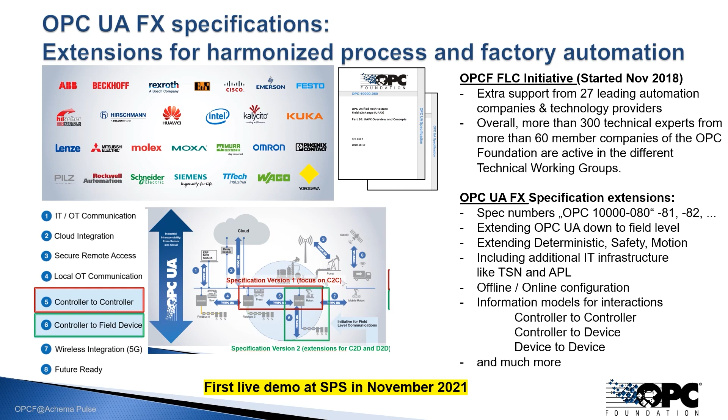Being a paying member inside the OPC Foundation guarantees you early information and you are able to influence the direction. Part of our community is, with more than 300 technical experts from more than 60 companies, the so-called Field Level Communications Initiative, which is bringing OPC UA down to the field, including deterministic, including functional safety and motion, but also harmonizing between the process industry and the factory automation world. This is what we need. And I'm looking forward to having the first live demo at this year's SPS show in November 2021.

I'm not talking deeply about OPC UA here, but again, it's open, it is open source, it is an IEC standard, it is vendor neutral, platform neutral, and independent from any operating system. It is not a protocol. Instead, it has modeling capabilities to design and model your information, bring them into a context, and then have inside the body multiple different protocols which also can be extended for future need, but then deliver an end-to-end secured data exchange. This is what we believe is critically important. Security has been baked in by design and has been reviewed by international security experts.

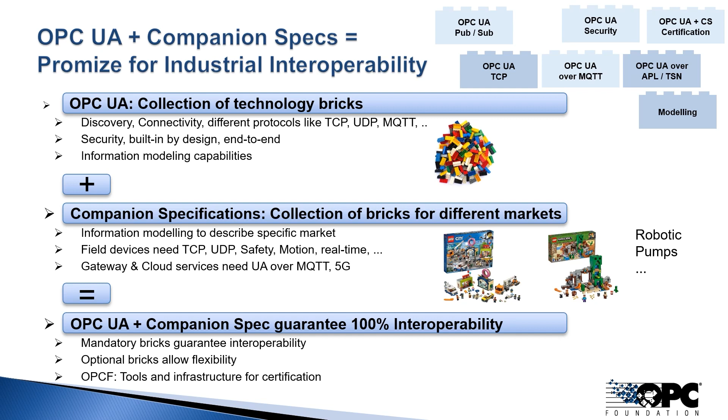Well, I'm an engineer, not a legal person, so I'm a little bit more careful here, but what we are very proud of is that the OPC Foundation is not only protecting their own members, instead we are protecting and have a commitment to take care of all implementers. That's critically important, and I think this is really unique. You don't find that many organizations on the market.

And second, we are extremely proud of our so-called multi-organization collaboration agreement, the MOCA, because this enables owners to easily agree on being a co-owner. Here, for example, we are really excited that the LADS companion specification for laboratory and analytical device standard just extended the ownership, which initially has been created by SPECTARIS, VDMA, and OPC Foundation, now to multiple other associations. And so everybody feels involved, everybody is committed, and this is how we can grow standards in the world. We need to work together, but we have to agree on the most open approach.

We are partnering with a lot of associations around the world. Definitely there's not a chance here to highlight a few of them, but please go to our web and have a detailed overview. As mentioned, we have over 63 international collaborations. In total, 48 companion specifications are published already as a released specification or available as a release candidate right now. So please go to the web and have a detailed overview.

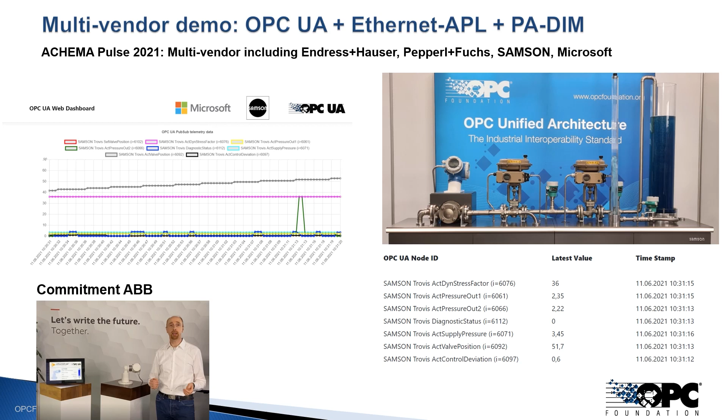If you want to learn more about a real-world success story and what have been the benefits of OPC and why the company Equinor have selected this, please join the detailed report from Equinor. They are giving much more detail on how they have connected 190,000 data points via OPC through the Microsoft Azure cloud, and they are even extending it up to 1 million data points.

This is a slide I started with at the beginning, explaining the 5 building blocks in detail. It's OPC, the framework, which is more than just a protocol because it includes the capability of information modeling for semantic interoperability. It includes security for end-to-end security. We are the largest ecosystem for secure industrial interoperability, including the field level communication initiative, bringing OPC down to the field level, including deterministic, functional safety, motion.

We have one of the most open IPR policies in the world, protecting also implementers, not only doing a commitment to our own members. We joined the Ethernet APL initiative because the OPC technology is extendable, same as we are extending it for the factory automation people with TSN and other technologies, or with 5G, to guarantee that we can have chained transport paths with multiple different infrastructures, but with a complete quality of service over different transport technologies.

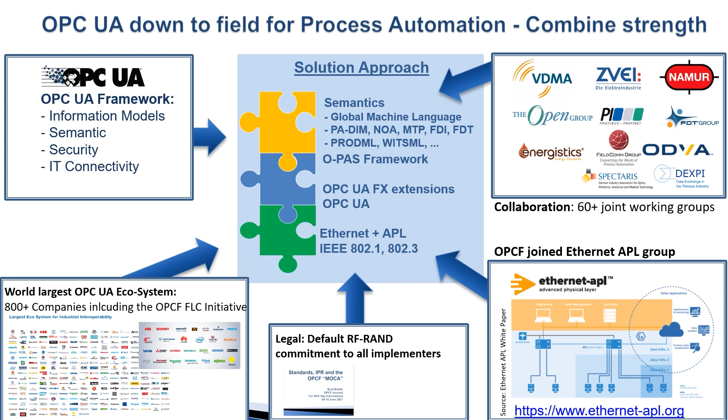That was my introductory overview presentation. I hope you enjoyed it and got some insights and additional information. Again, I'd like to invite you to all the offerings here at the ACHEMA Pulse. We have multiple presentations on the technology, on information models, or how to move data from the field vertically up to IT and cloud, to Microsoft or SAP from our board colleague companies.

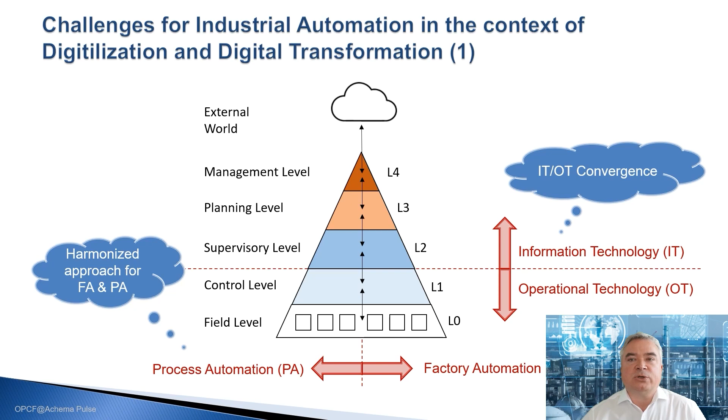What we also recognize is that today we have quite different solutions, different products, and even different technologies being used in factory automation and process automation. But certainly the requirements are quite similar, if not to a large extent identical. This is why in future we have to strive for a harmonized approach that is not distinguishing what kind of industry or vertical products or solutions are being used for.

Probably one of the key challenges is the huge diversity that we have with regard to protocols and data models, especially when we look at the field level, because there we have all the different field buses and real-time Ethernet protocols. We still have digital and analog interfaces. And looking at the data modeling, we also use different device profiles just out of historical reasons.

But this is all making life complex and difficult, especially if you want to analyze data, if you want to derive certain strategies out of the information that you collect from the plants and factories. This is why we have to come up with solutions that support the so-called semantic interoperability.

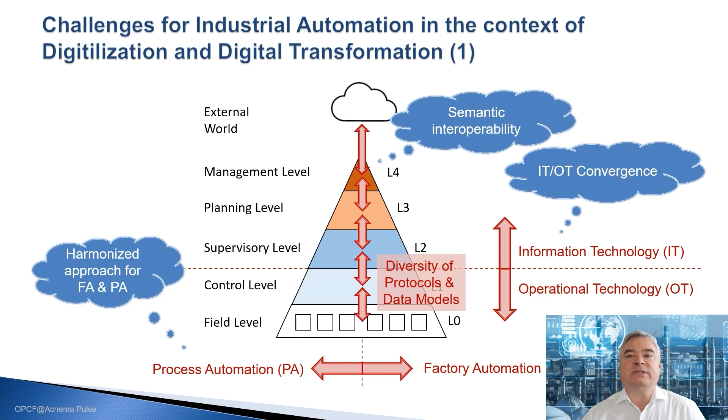Even so, this is beneficial because existing solutions can be kept and the connectivity is improved by the second channel. At the same time, there are some disadvantages. You are adding an additional second channel, so the devices need to support an additional protocol, increasing the complexity. And this is also only a unidirectional path from the process up to edge, up to cloud.

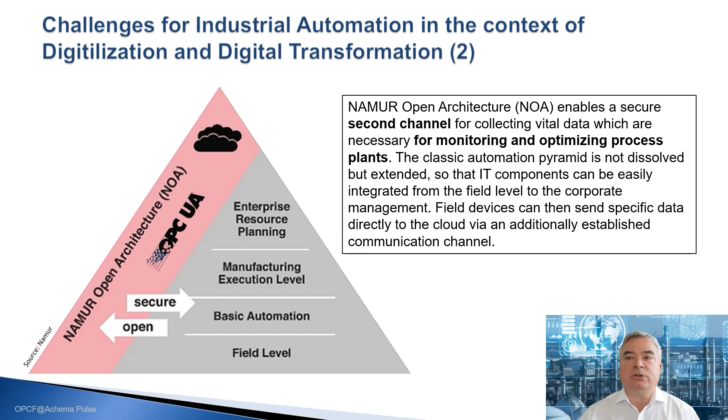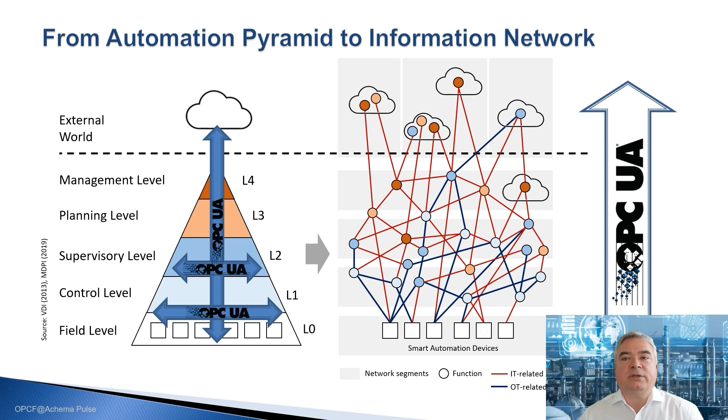Now, the approach of the OPC Foundation with the launch of the Field Level Communications Initiative back in November 2018 is to extend OPC UA to the field level so that it fully scales from the field up to the cloud, not only vertically in both directions, but also supporting horizontal integration, the horizontal communication. With this approach, OPC Foundation targets to convert the classical automation pyramid into a much more universal and flexible information network, where you can have direct connectivity between devices, controllers and software applications, independent of whether they are located in the field, the edge, or even the cloud.

Now, OPC UA today is already used in many different application areas. You find here some examples listed with the numbers 1 to 4: secure remote access, local OT communication, and cloud integration. The Field Level Communications Initiative is now extending the use cases to also cover controller-to-controller and controller-to-device, listed here with the numbers 5 and 6. And this also includes device-to-device.

To support these use cases, the OPC UA framework is being extended with features and functions for field exchange. This is why we name these extensions OPC UA FX. This includes, for example, extensions to support functional safety, to support real-time data exchange including deterministic transport. It also defines features, what we call facets, for motion control, for remote IOs, and also the connectivity to field instruments.

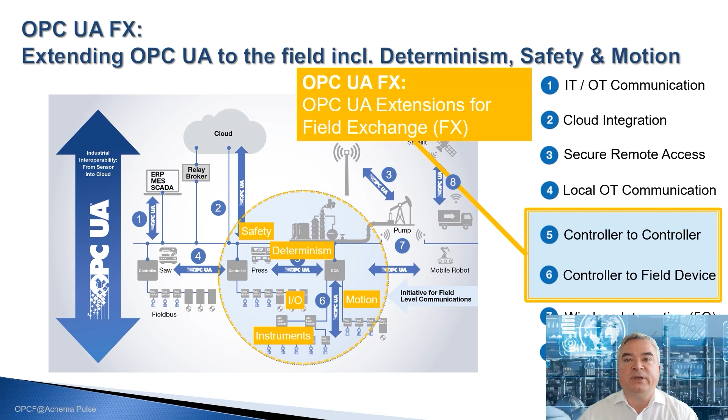Let me talk a little bit about the initiative itself. The initiative is supported by overall 27 member companies that are part of the so-called steering committee. These companies bring in additional resources, financial resources, but also manpower and expertise.

Browsing through the logos, you see that all the big players in industrial automation are supporting this initiative. So we have, for example, from the US, the companies Emerson and Rockwell Automation. We have from Europe the companies ABB, Siemens, and Schneider Electric. And looking to Asia, we have the big players out of Japan with the companies Mitsubishi, Omron, and Yokogawa.

The technical solution being elaborated is supported by more than 320 technical experts coming from more than 65 member companies of the OPC Foundation. This makes us really proud that this initiative is getting such strong support from industry all over the world.

Now, first of all, I want to highlight that in order to support industrial interoperability, you need to have standardization at all the levels listed here on the slide. So you need standardized network access, you need standardized protocol, and you need standardized data semantics.

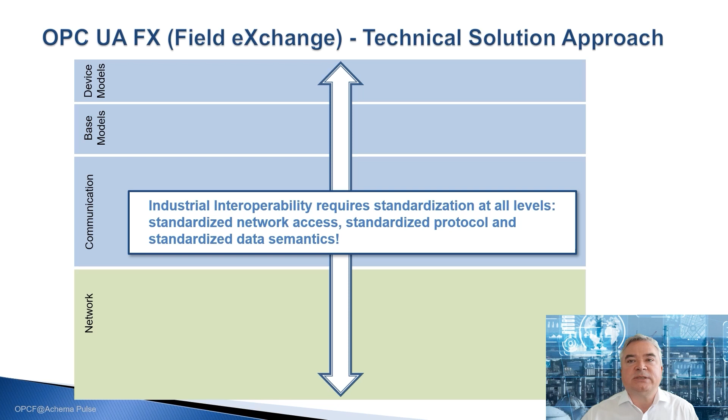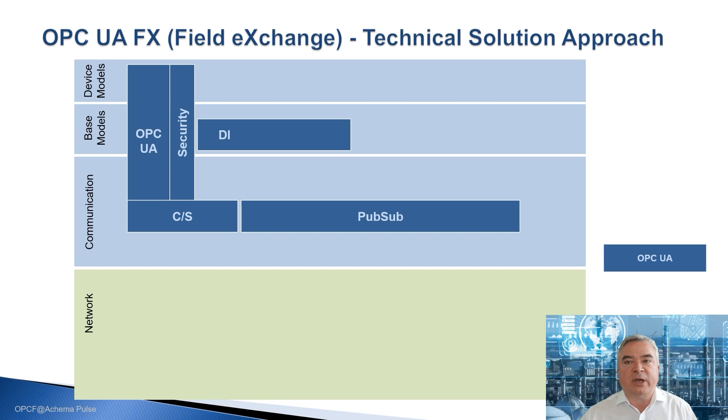The solution for field exchange, OPC UA FX, is built upon existing OPC UA technology with built-in security, information modeling, client-server services, and publish-subscribe extensions. The technical working groups of the FLC initiative are then extending the information models to support the various automation components, including offline configuration and common behaviors, for example to set up connections between the various automation components and to do the bootstrapping of a complete system.

On top, we then have the various extensions and features to support the various application areas and device types. So there are facets for functional safety, for motion control, for instruments, for IOs, and so on. The concepts are done in a way that existing device companion specifications can be integrated. So this is where we can, for example, integrate the PADIM information model, or the MDIS, or the DEXPI, and all the other companion specifications elaborated through the numerous cooperations the OPC Foundation has all over the world.

Now, if we look at the lower levels, we are relying on various IEC and IEEE standards.

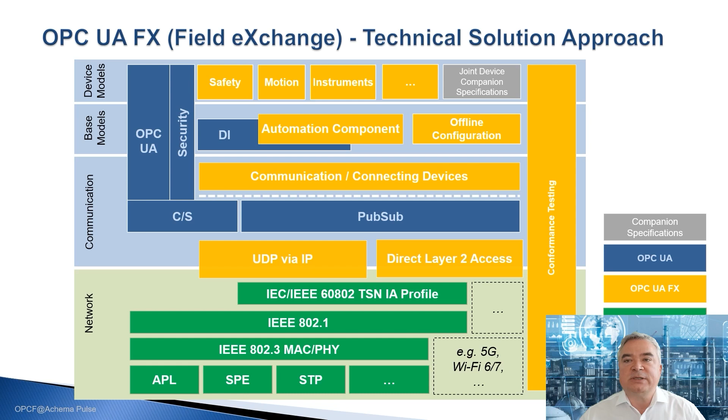A key technology for OPC UA in the process industry is the Advanced Physical Layer Ethernet APL, as already mentioned, because this is bringing Ethernet to the field even in hazardous areas. And because APL is transport agnostic, it supports different industrial protocols, including OPC UA.

This is why the OPC Foundation has become a member of the APL initiative a few months ago, to support the further development of the technology and also to jointly promote Ethernet APL with other standardization organizations.

Now, talking a little bit about the current status of the project and the achieved results. The first specification release, the so-called Release Candidate 1, has been completed, consisting of 4 parts, parts 80 to 83. These specifications are currently being used to do prototyping and to create test specifications as well as test scripts for the certification tool of the OPC Foundation.

Furthermore, these specifications are laying the foundation to do specification enhancements for the additional use cases, controller to device (C2D), including also device to device (D2D) in the next step.

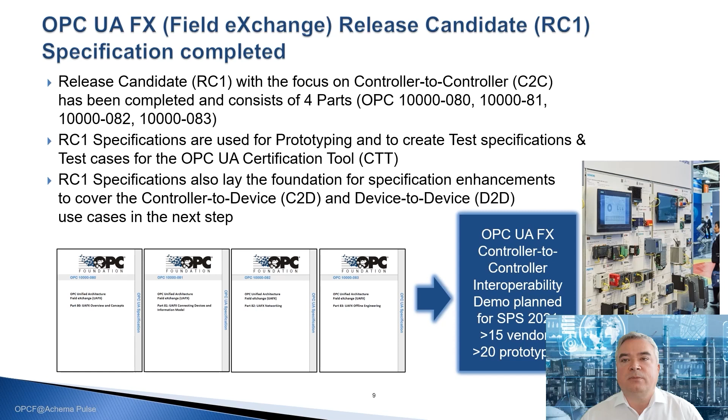Now, with the controller-to-controller specifications developed by the FLC initiative, we allow horizontal integration and horizontal communication between controllers of different manufacturers. So this is the initial step.

And then by bringing OPC UA down to the field devices with the use cases controller to device and device to device, we then have OPC UA as one consistent and standardized interoperability communication solution that is fully scaling vertically as well as horizontally.

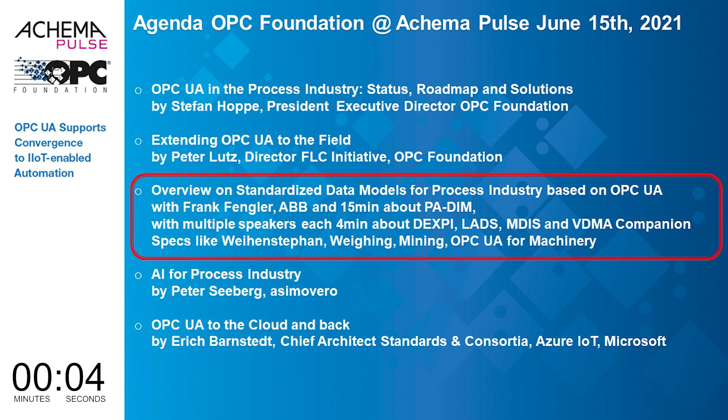Hi, my name is Fengler. I live in Minden, Germany and work for ABB for more than 20 years.

PADIM started in 2017 by Fieldcom Group as a joint working group together with OPC Foundation. When starting, a team of highly engaged Fieldcom Group members driven by key process automation vendors like ABB, Endress & Hauser, Yokogawa worked in close collaboration with end-user organizations like Namur, who provided use cases and requirements. OPC Foundation experts helped with deep questions concerning OPC UA technology.

Goal is to standardize an information architecture for all process automation devices using OPC UA as a base and the DI model.

Some definitions. Information model: a nested, hierarchical description of an asset including identification, diagnostics, process signals and configuration.

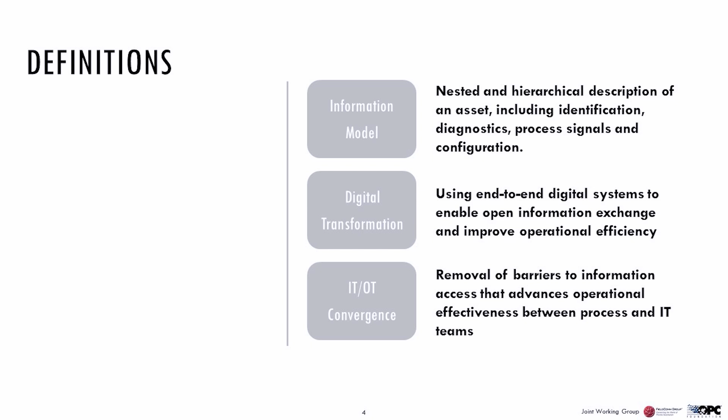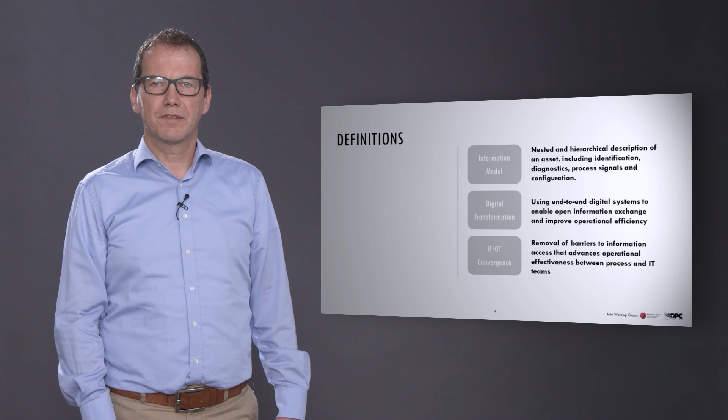Digital transformation: using end-to-end digital systems to enable open information exchange and improve operational efficiency. IT-OT convergence: removal of barriers to information access that advances operational effectiveness between process and IT teams. These definitions are important because they guide us through the whole presentation and are important to understand.

Crossing the OT-IT chasm. OT understands automation protocols, fieldbus, device descriptions, DDs. Plant IT understands asset management, Ethernet and security. And the enterprise IT understands ERP systems, analytics, security. So everybody understands something in his domain.

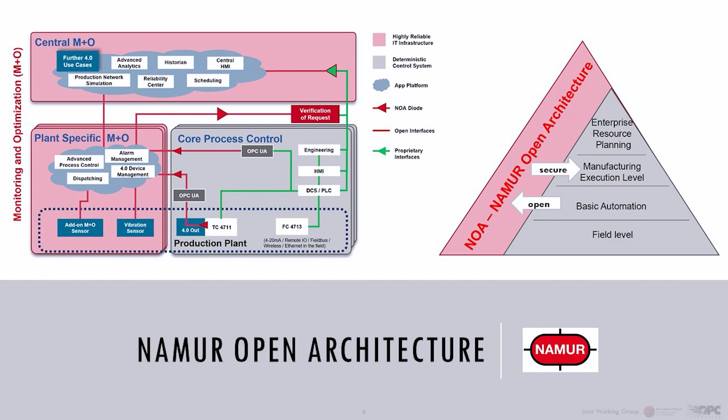Therefore, Namur has created the NOA information model. The key is that Namur first thought about the use cases and then derived the parameters necessary for these use cases, and all of this is mandatory defined. PADIM is used to implement the NOA information model with OPC UA.

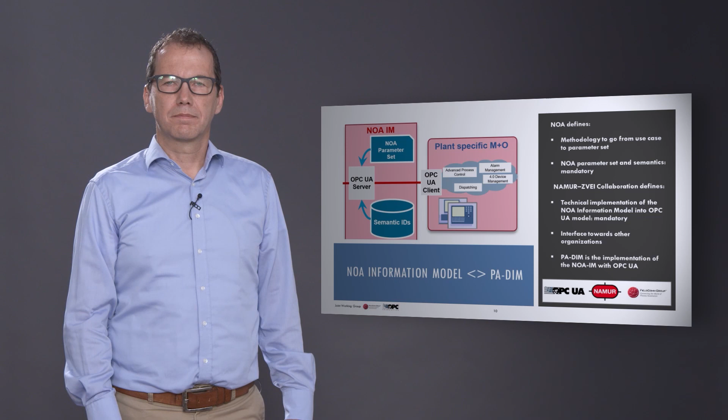Crossing the OT-IT chasm: what is necessary is Ethernet APL, OPC UA, and PADIM. These are the 3 important technologies which are necessary to cross the bridge.

Now coming to PADIM, Process Automation Device Information Model. Important points are semantic identification, defined signal variable types, and reusable interfaces.

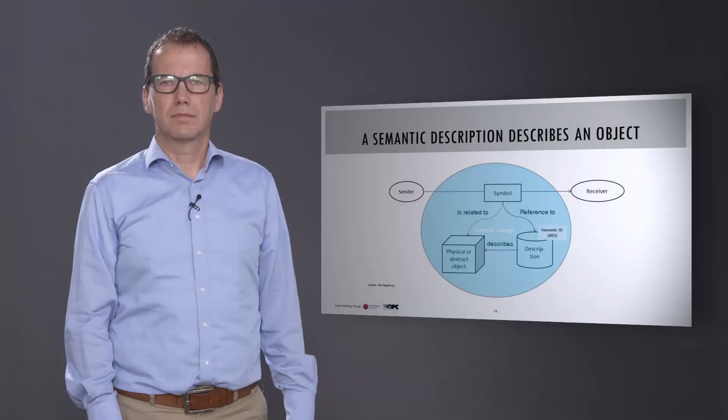in process automation. We have seen the picture on this slide already. Now I would like to provide you some more details. We have the protocol-independent OPC UA information model for process automation devices, and in the first step we provide it for pressure and temperature transmitters, for flow meters, for level transmitters, and for valve positioners. Future device types will follow.

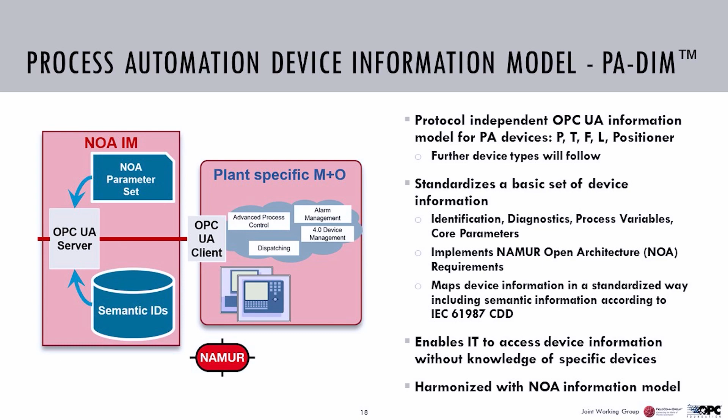It standardizes a basic set of device information for identification, diagnostics, process variables, and core parameters. It implements the NAMUR Open Architecture requirements and maps the device information in a standardized way, including semantic information according to the IEC 61987 Common Data Dictionary. It enables IT to access device information without knowledge of specific devices, and this is a harmonized information model with NOA, with the NAMUR Open Architecture Information Model.

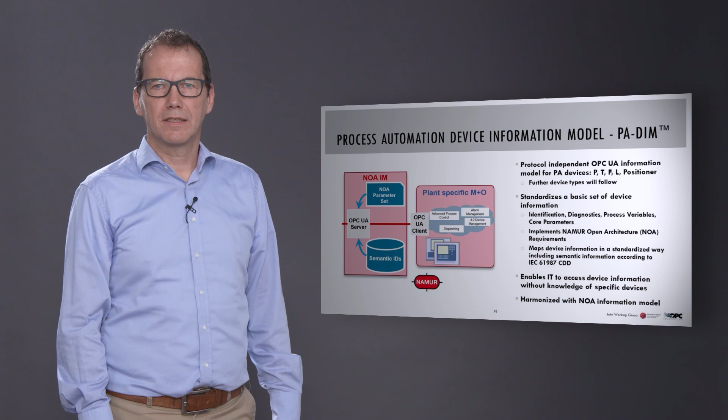As told, NAMUR started from use cases. It is very important to always have a use case in mind when defining an information model. The first use cases which were considered are unique identification, which is very important to know which devices are within your plant, to know that what you have planned is also what you have built in the end. Dimension check: if you have a flow meter which is too large for the application, you could reduce the size and reduce the cost. And some more use cases like device lifecycle backup, multivariable possibility check, or also device health, which is very important for diagnostics.

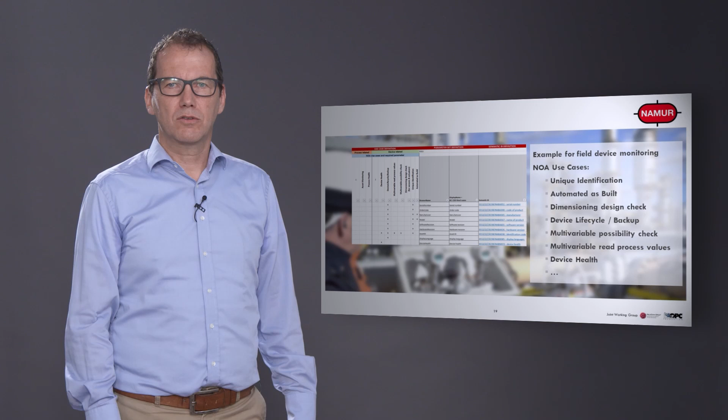Again, some very important definitions. A device. A device is a globally unique physical component identified with a product instance URI defined by the manufacturer. This is often stamped on the outside of a device as a QR code. Asset ID. An asset ID is a user-writable alphanumeric character sequence uniquely identifying a device. The ID is provided by the integrator or user of the device.

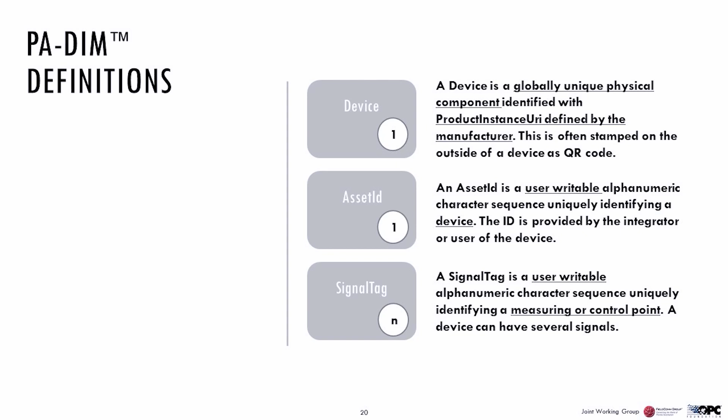Signal tag. A signal tag is a user-writable alphanumeric character sequence uniquely identifying a measuring or control point. A device can have several signals. As you see, the first one is defined by the manufacturer. The asset ID and signal tag are defined by the user. I have underlined the key words because that is very important for the information model to understand.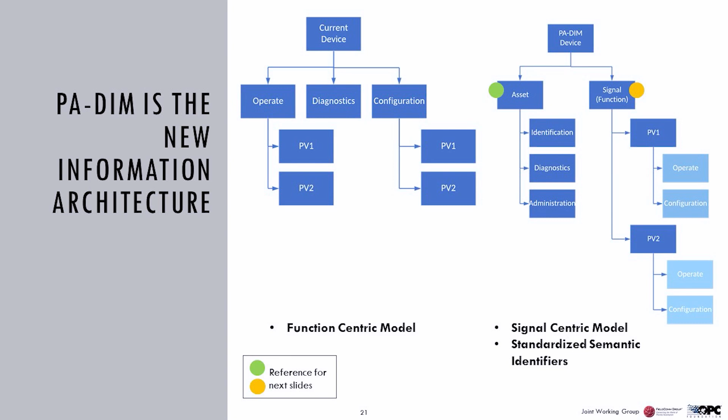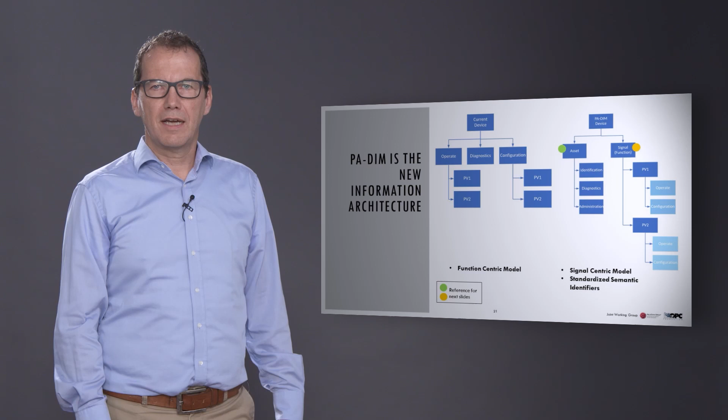We divide it into an asset and into signals. The asset defines the device with identification, diagnostics, administration parameters, and the different signals. Within the signal, you can not just see the value of the signal, you can also configure it. So you have both functions together, so that when you change the configuration, you can immediately see how the value is changing. There are some bullets in green and orange that are important for the next slide to see what is the asset and what is a signal.

PADIM, this is now the detailed information model shown as a Visio drawing, and the green bullets show what belongs to the asset. The asset is reusing interfaces from OPC UA Part 100, the DI model. Within the DI model, there are interfaces defined for vendor and tag nameplate and device health, and these interfaces are reused in PADIM.

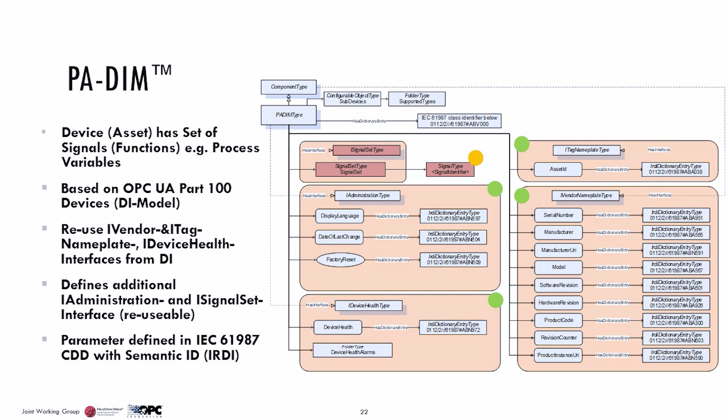But PADIM defines additional interfaces, for example, for administration and signals. The administration interface provides important things like a factory reset. And the signals interface provides access to the different signals of the information model. All of these parameters are defined in the IEC 61987 Common Data Dictionary with a semantic ID.

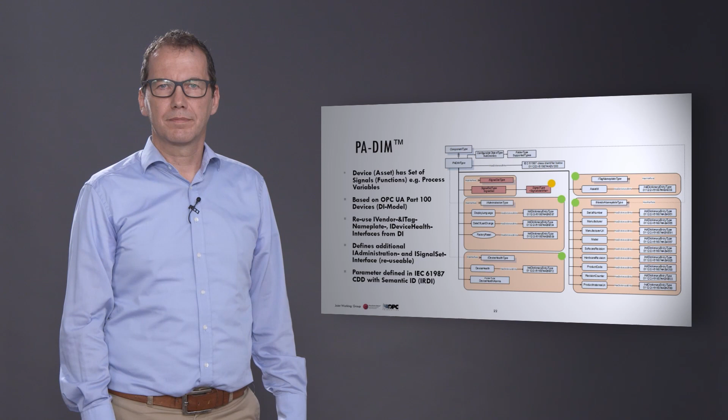Signal information model. That is very important, and that is an extension of what we defined in PADIM to OPC Part 8. We have defined signal variable types, which can be analog or discrete, which provide simulation, and which can be used at any object.

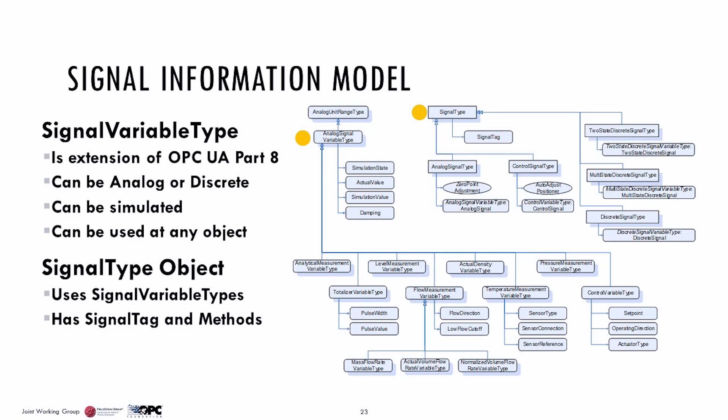In addition, we have signal type objects. These signal type objects use the signal variable types and also provide access to methods or the signal tag, the name of the value. If you need more information, go to fieldcomgroup.org/PADIM or to the OPC Foundation to download the specification, which is now released as version 1.0.

Actions that you can take: join the Joint PADIM working group.

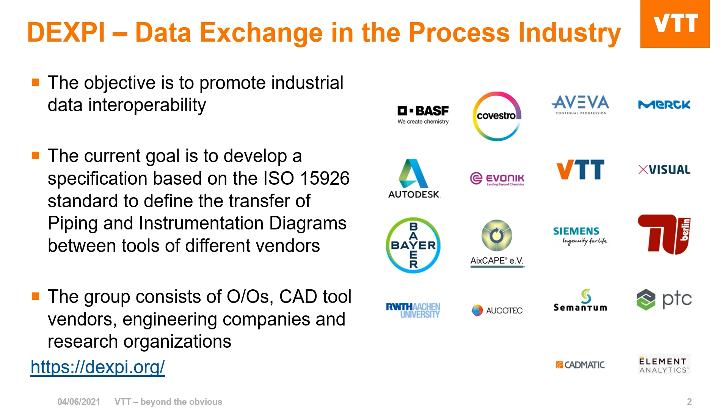The group itself consists of owner-operators, CAD software tool vendors, engineering companies, and research organizations that are supporting the development of the specification. The DEXPI file format is the Proteus XML based on the ISO 15926, but also with additional metadata that follow the DEXPI specification.

These XML files can be imported or exported by software that supports the DEXPI format, but also act as an open data container for all kinds of applications that can find this information useful. A joint working group between DEXPI and the OPC Foundation was established to create a companion specification that would enable the access of piping and instrumentation data following the DEXPI format using OPC UA. This working group was led by VTT.

In this way, information can be accessed in the same way as all other kinds of industrial information that support OPC UA, in that it can be open, unified, and standardized. Also, another use case is that we can potentially support online collaboration on P&ID design using tools from different vendors and the data on an OPC UA server.

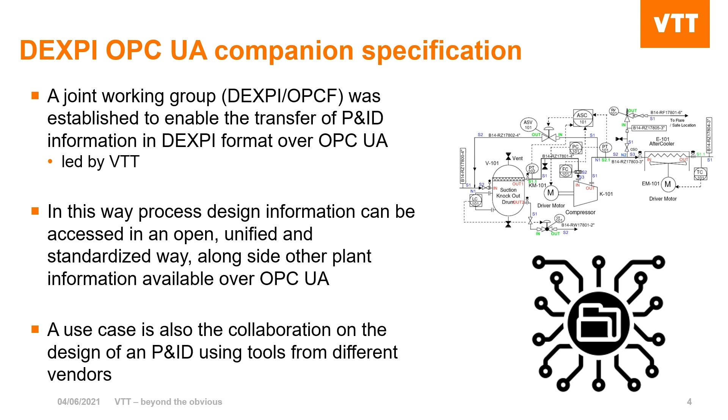The companion specification is at release candidate status. It has gone through technical advisory committee review. We have fixed some comments and we are now also addressing some more challenges that have come up. But we hope that we have it available soon.

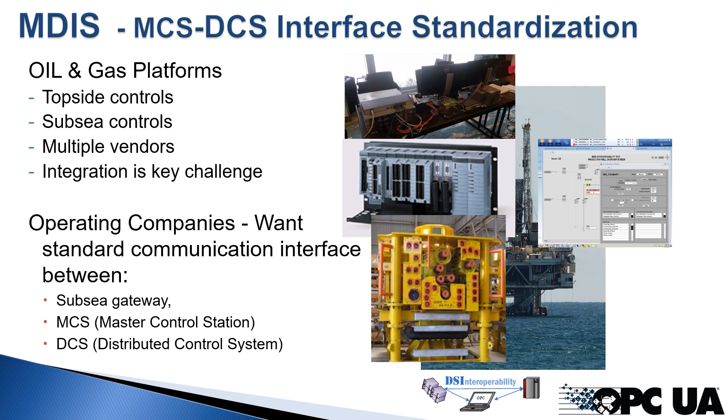So what is MDIS? MDIS is an OPC UA standard for oil and gas platforms. It provides an interface between the topside controls and the subsea controls that are present on a platform. These controls are typically provided by multiple vendors, and the key challenge here always has been the integration of these two diverse systems. Operating companies wanted to standardize this interface, the communication interface between the subsea gateway and the MCS to the DCS systems.

Who is MDIS? MDIS is a grouping of major oil companies, DCS vendors, and subsea vendors. These groups are equally represented and worked on creating the MDIS standard. What was the goal of MDIS? It was to reduce the engineering and testing costs associated with these platforms. They want to do this via standardizing the interface and the information model. MDIS evaluated a large number of protocols. They chose OPC UA as the best protocol for doing this.

We've been working a long time on this. We've had a number of releases, so currently we're on release 1.03. We've had a lot of interoperability events to check and confirm and even showcase the functionality that MDIS provides. And currently there are quite a few projects out there utilizing MDIS.

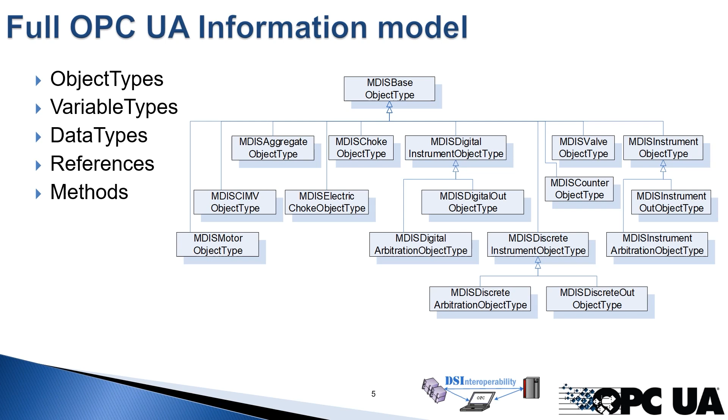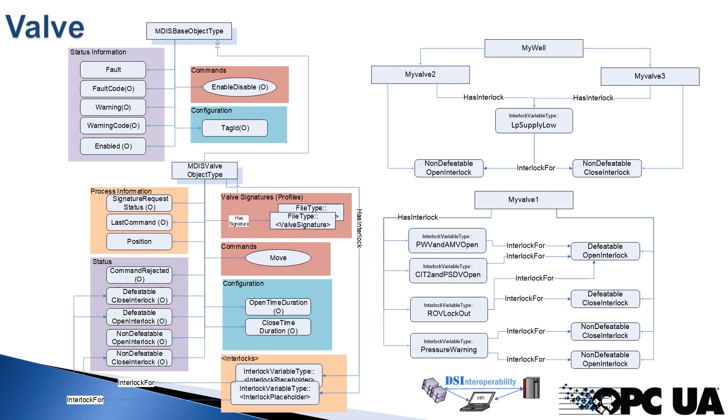It provides a full information model. This includes support for object types, variable types, data types, and even methods that provide interaction between the objects. Some of the objects in MDIS are very customized to the subsea venue, such as a valve, which is a very slow, large object. It includes interlocking capabilities. It includes signatures and profiles that are needed for judging if the valve motion is correct. The MDIS specification also includes interactions between all of the subsea systems and valves. So this is the client and server interaction that's required. It includes redundancy.

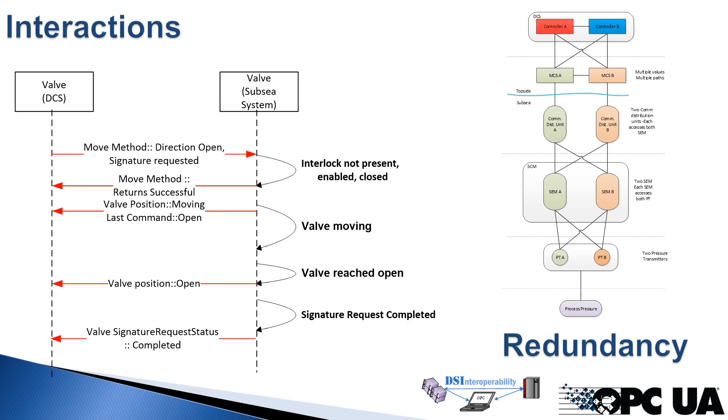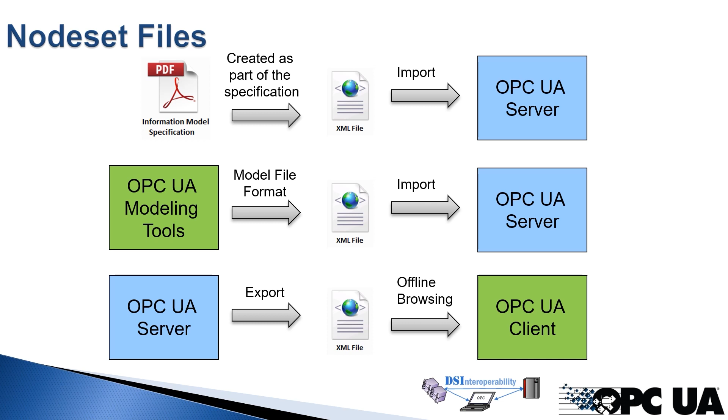The other key concept in MDIS is the utilization of standard OPC UA node sets. A node set in OPC UA is an XML representation of the information model in a server. In MDIS, the servers are the subsea systems, and the clients are DCS systems. And this usually requires a great deal of manual configuration work to ensure that the DCS system has the same data and is looking at all the data in the server. The use of node set files, which are then consumed by the client tools, and auto configuration for the DCS greatly reduces testing costs and engineering costs, because there are no errors for data entry. This is just what was provided.

MDIS provides a full certification program via the OPC Foundation. This includes a complete check of the MDIS specification, all aspects of it. The MDIS organization defined test cases and provided test enhancements to the OPC Foundation CTT test tool, so that all the automated testing and scripting is available. This results in a certification logo from the OPC Foundation.

Another key item in the MDIS specification is a recommended practice section. This is a section for the operators and how the operators should specify or require MDIS via a bid proposal: what items are included, what things can be specified, and what should be specified via recommendations. MDIS is also recommended by API 17F, which is the oil and gas standard specification.

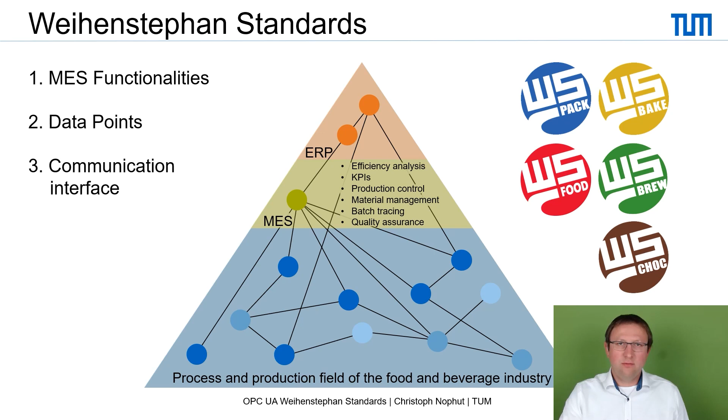The Weihenstephan Standards Companion Specification uses 2 additional companion specifications. One is the companion specification for machinery, and we are using the building block for machine identification there. The second companion specification is the PackML one, and we are using the state machine for the machines there.

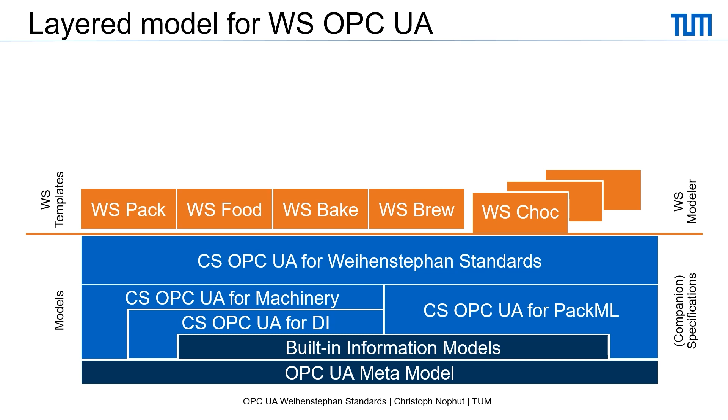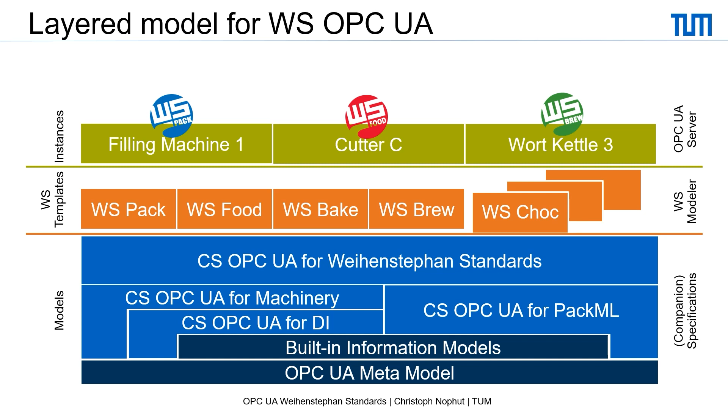To handle over 150 different machine classes, we decided to introduce WS templates. WS templates contain 3 aspects. One is the machine classes, the second aspect is the definition of the WS data points, and the third one is a permutation table between the machine classes and the WS data points. So you can get out of the WS templates and the companion specification your machine instance for all of our WS domains.

In the Weihenstephan Standards Industrial User Group, a large number of companies from different industries are organized to continuously expand and improve the Weihenstephan standards. And our community is still growing. The Smart Production Systems Research Group at the chair of Brewing and Beverage Technology at the Technical University of Munich leads this working group. If you have any questions about the Weihenstephan standards, the Industrial User Group, or the companion specification itself, you are welcome to contact me or visit our website.

Welcome to the presentation on our OPC UA mining initiative. My name is Jan Lehmann, VDMA Mining, and I'm responsible for the organization of this initiative. I would like to introduce Dr. Fiona Mavroudis, Eickhoff Bergbautechnik, who is the chair of our International Joint Working Group. Mr. Tobias Hartmann, Institute for Advanced Mining Technologies of RWTH Aachen University, supports the development process of the mining companion specifications.

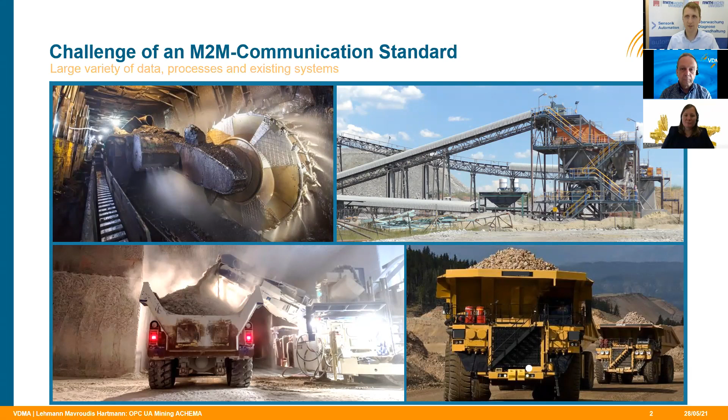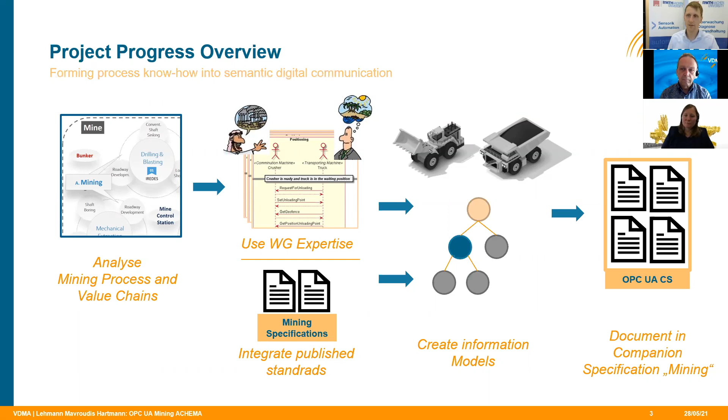How do we do that? We developed a process where we analyze the processes and the value chain in the mining environment that are of most interest for the producers and the manufacturers, and use the expertise in the working groups to analyze the processes and identify the information to be communicated and to be used to automate the process or supervise processes, and that we then integrate into our information models. Furthermore, we integrate existing standards into the information models to also be used in the OPC UA standard. Last but not least, we do document, of course, everything in the companion specification to be published.

Our partner structure consists of over 60 participants from around the world, from Canada to Australia, that participate in the joint working group, that furthermore splits up in different groups of different interests, and that do work together to define the common language in the different applications. And all these groups are, of course, consisting of operators, OEMs, and are also supported by the academia. Furthermore, we integrate existing standards such as IREDES or fleet management standards, or even the GMG time usage model to be integrated into our companion specification.

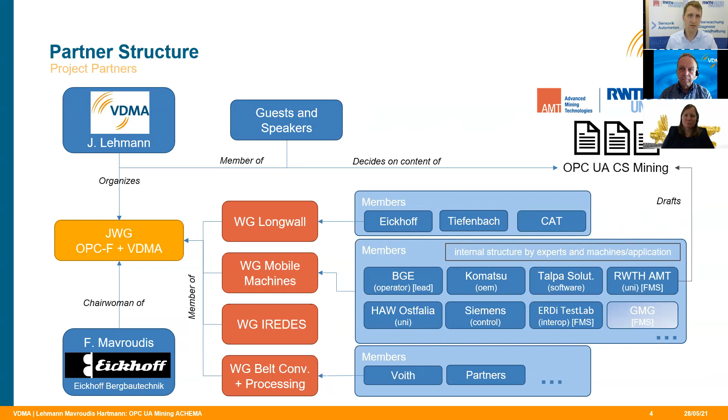So working on the OPC UA companion specification for mining, it's a great experience and will be an even greater pleasure to hold the first compliant product in your hands. We would like to close this presentation by inviting you warmly to join us. We're looking forward to welcome you in the joint working group to work together on the digitization of mining and connect the future. Thank you very much.

Hello, my name is Heiko Herden. I'm working at the VDMA, the Mechanical Engineering Association, and I'm the chairman of the OPC for Machinery Companion Specification Working Group. Today I want to talk with you about how to achieve cross-sector interoperability. We are coming from Industry 3.0, which is characterized by proprietary communication. Now OPC enables a meshed communication network, which is the first step to interoperability. The next step is to create information models which describe the exchanged data in a semantic way. This is done with OPC companion specifications.

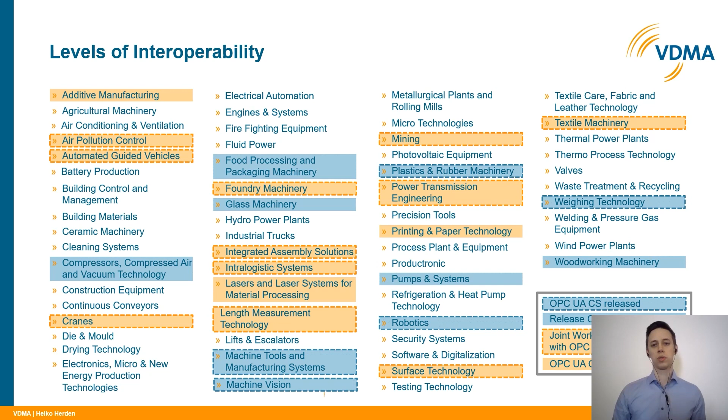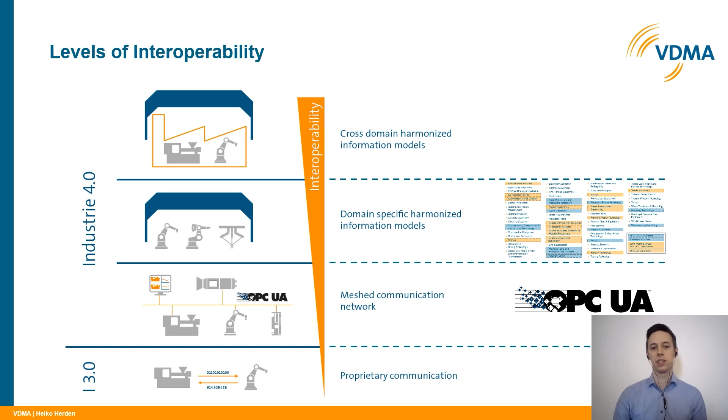The VDMA and its member companies are very committed to the creation of those OPC companion specifications, as you can see on this slide. The VDMA is divided in several organization units, which are shown here. The ones marked in orange are currently working on companion specs, and the ones marked in blue have already released such a document. In conclusion, we have about 35 working groups currently working on OPC companion specifications. These efforts lead to domain-specific harmonized information models. But the king class of interoperability is to have cross-domain harmonized information models. And this is done in OPC for machinery. So, let's take a look at OPC for machinery. What is it? It is a companion specification for the whole mechanical engineering industry.

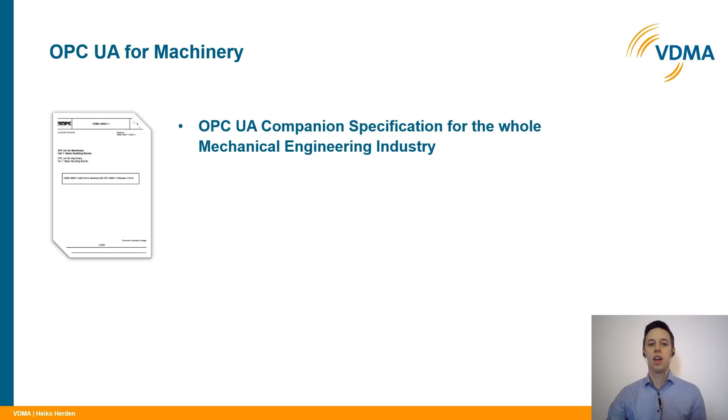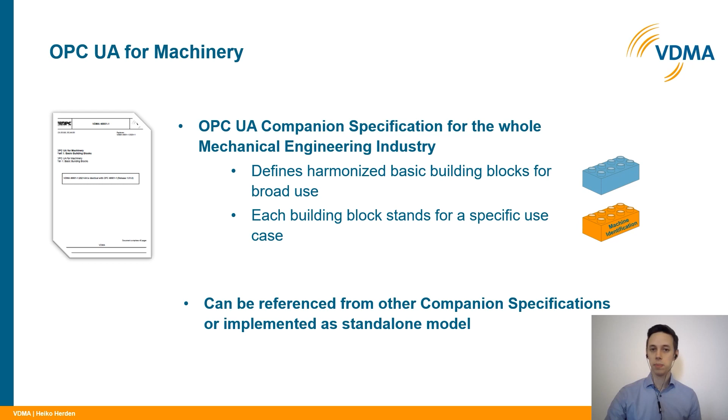This means that it applies for machines like injection molding machines, robots or woodworking machines, as well as components such as pumps, scales or electrical drives. OPC for machinery defines basic building blocks for the broad use. Each building block stands for a specific use case, such as machine identification or machine state. The machinery spec or single building blocks can either be referenced from other companion specs or be implemented as a standalone model. So you could say that OPC for machinery forms the basis for interoperability.

Now let's focus on those building blocks. We started with machine identification, which enables a unique identification of the machine with properties like manufacturer and serial number. Then we proceeded with component identification, which is pretty similar to machine identification, but designed for components. And furthermore, we have the released building block listing of machinery items.

This is needed when you have an aggregating OPC server with several machines connected, because then you can see all of those machines in a single folder, at least the machines that have the machine identification implemented, and also you can take a look into the machine and see all the components which are part of the machine, at least if they use the component identification.

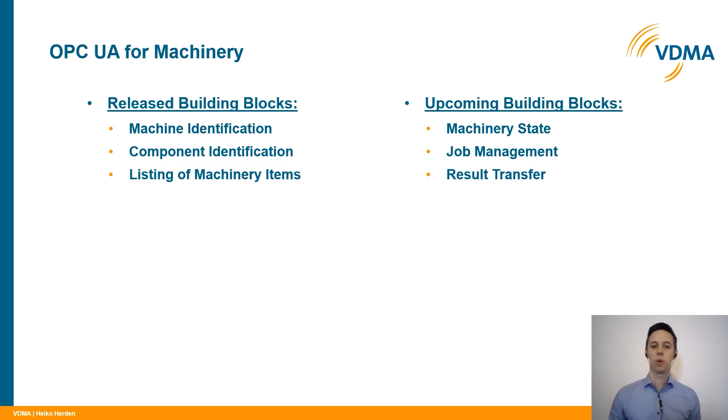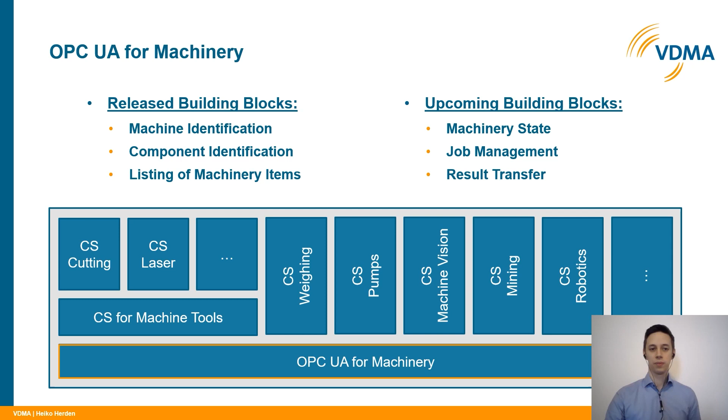Okay, I'm at the end of my short presentation about OPC UA for machinery.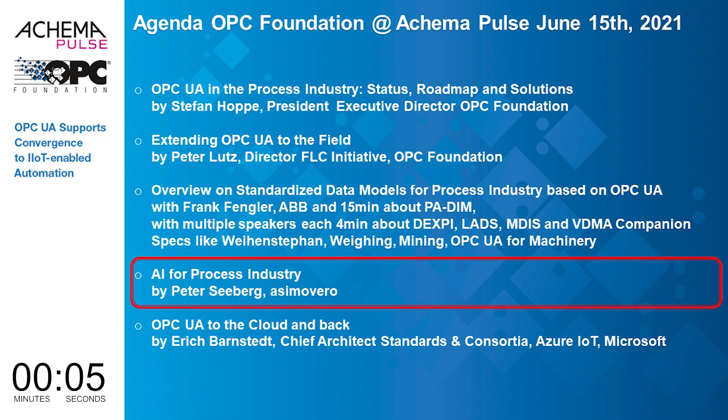Hello and welcome with the OPC Foundation. It's a pleasure for me to announce our next guest. It's a personal pleasure for me because I have known Peter Seeberg for years. But for a starter, Peter, please introduce yourself. What is your job? And how did you come to work with artificial intelligence? This is our topic today.

Oh, certainly, Stefan. Thank you very much. Yeah, my name is Peter Seeberg. I was born and I studied computer aided design in Delft. That's in the Netherlands. I've worked about 25 years in IT, most of the time with Intel, but also for a number of software companies. And about 10 years in industrial space, mainly discrete, but also process automation, which is the time that I came across OPC UA technology. And as you just mentioned, you and I, together with a couple of other folks, have been traveling around the world and making OPC UA known to the world.

So I've dealt with introducing AI, artificial intelligence, into industrial space for the last 10 years. And I've been an AI consultant for 3 years now. I live in the Munich area. I write books on artificial intelligence, and I co-produce a number of podcasts on the topic of AI and also OPC UA. Yeah, definitely good times we share together.

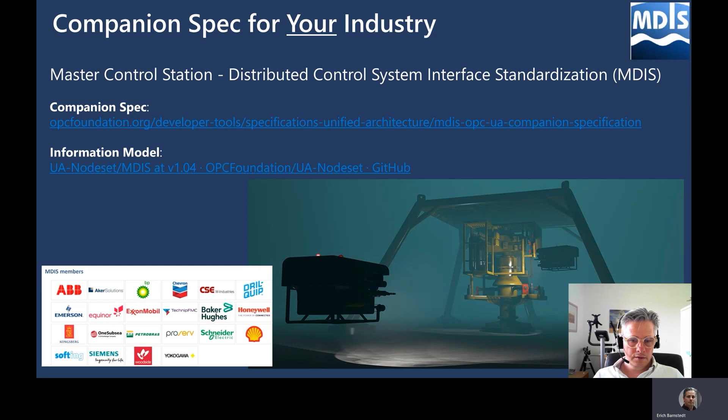So what does that mean in terms of standards for the Platform Industry 4.0 reference architecture? Well, OPC UA is mandated as the information model and the communication infrastructure for client-server communication.

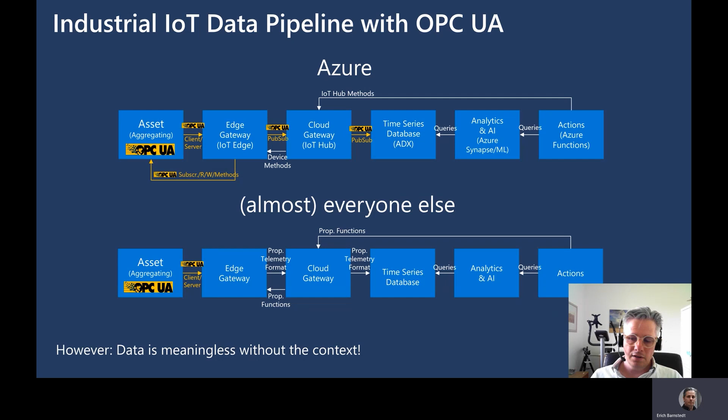So there's a separate talk on this topic, so I'll just briefly mention it here. We have this thing called the UA Cloud Library, which is kind of the missing piece in this entire telemetry pipeline. It allows you to upload OPC-UA information models to the cloud and leverage them, read them on demand as you're doing your analytics, which is kind of handy. So your time series data can be just the time series data, and you can look up the information model that is associated with that particular time series.

Very soon you'll be able to leverage the cloud library. So we're working on releasing the spec. It's in draft, it's in review right now with the OPC Foundation, and hopefully we'll be able to release it soon. And then we've also started some POC prototype implementations of it already. And of course, we're going to open source them, and you can make use of it then.

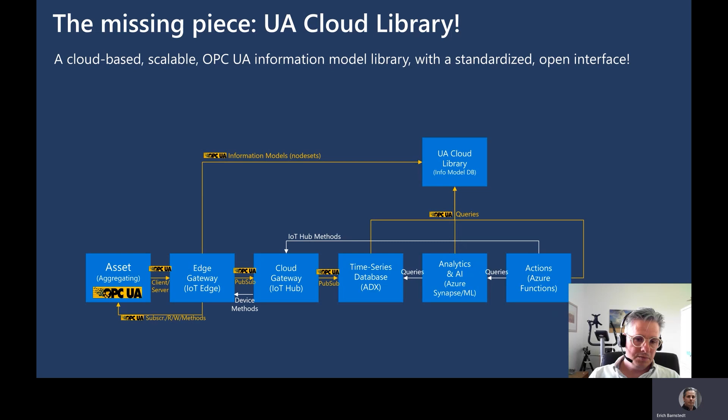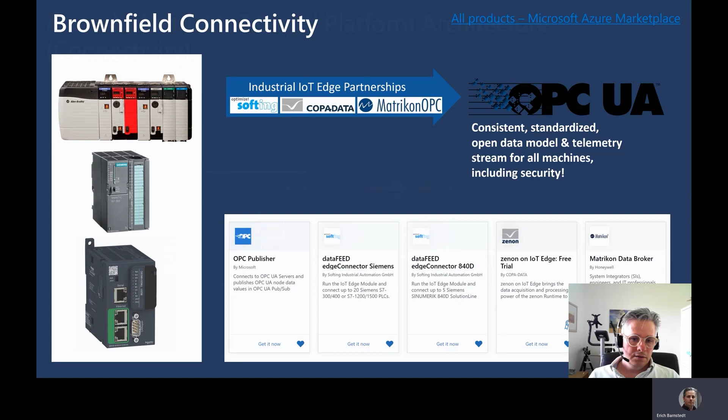So in terms of very basic connectivity, you don't need a lot of services at all. Edge is free, OPC Publisher is free. You can leverage the connectivity adapters I just mentioned from the Azure Marketplace, and then all you really need is an IoT Hub.

So really, to sum up, step by step, we support at every step, and we have the services available to make that happen without locking you in to the Microsoft ecosystem. So that's the key for today. Thank you very much for listening.